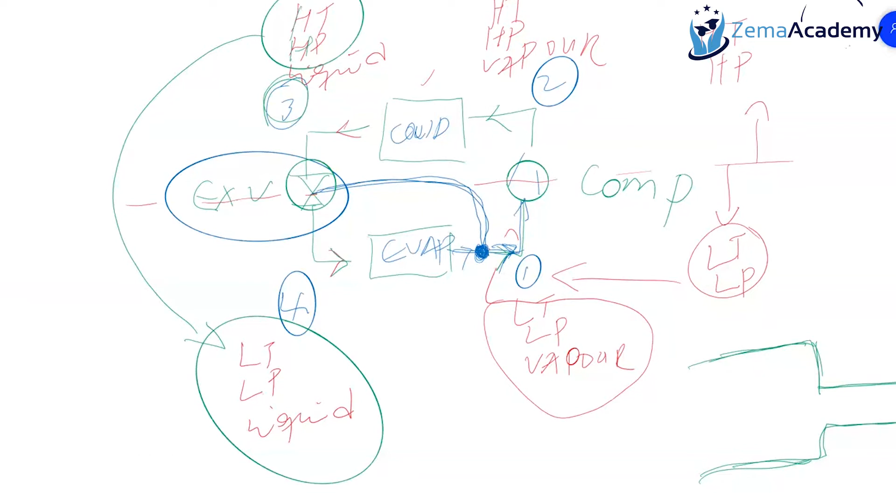A venturi and an orifice. So imagine this is a pipe, and all of a sudden we are reducing the area of the pipe. Imagine you have pressure and velocity here, P1 and V1, and another pressure and velocity here. What happens to the velocity from point 1 to point 2? If you suddenly reduce the area of the pipe, the velocity has to increase. And Bernoulli's principle states that velocity and pressure are inversely proportional. So you have area 1 and area 2; if you increase the velocity by reducing the area of the pipe, we reduce the pressure. So there's a pressure drop, and P2 reduces in that small area.

So any venturi or orifice uses Bernoulli's principle. They constrict the area of the pipe, and therefore increase the velocity but reduce the pressure. So we have a big pressure drop here. And if you reduce the pressure, what happens to the temperature? It reduces. Remember, pressure and temperature are directly proportional; whatever you do to the pressure, temperature will always follow. This is the principle behind any expansion valve: by reducing the area which the refrigerant passes through, we reduce the pressure and therefore the temperature.

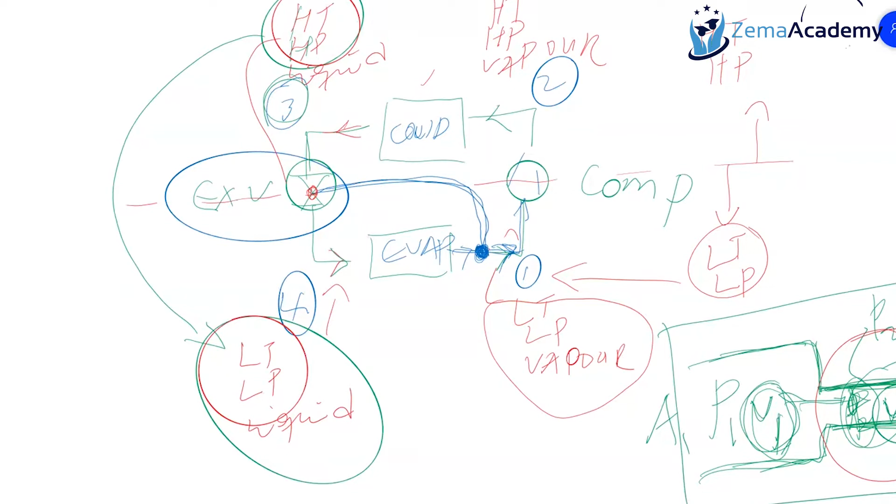So if we go back to our diagram, by having that venturi or orifice here, we reduce that high temperature and high pressure, and at point 4 we have low temperature and low pressure liquid. We will look at some of the expansion valves, and don't forget, all of them have an orifice or venturi, and they all use Bernoulli's principle, looking at pressure, velocity and area of a pipe. The function of an expansion valve is to regulate the flow of the refrigerant.

Okay, and the way we regulate the flow of the refrigerant is by either using a fixed flow or a variable type of flow. So on one aspect, we're not able to react to the pressure of the system or the heating or cooling capacity of the system. It's very fixed. And the other types, we are able to respond depending on the pressure in the system, depending on the temperature in the system.

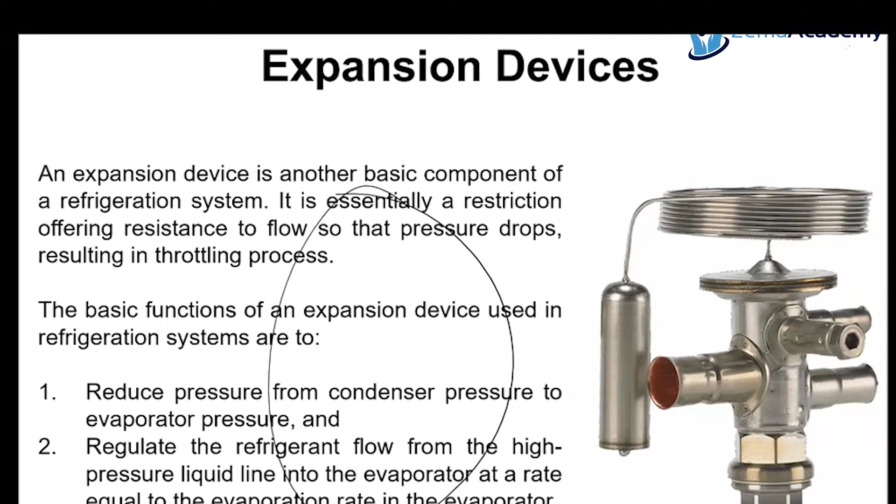We are able to vary the flow of the refrigerant coming in from the condenser, passing by the expansion device. So yes, again, we have a fixed opening type and a variable opening type. And those are the two types of classification method that we can use for expansion devices.

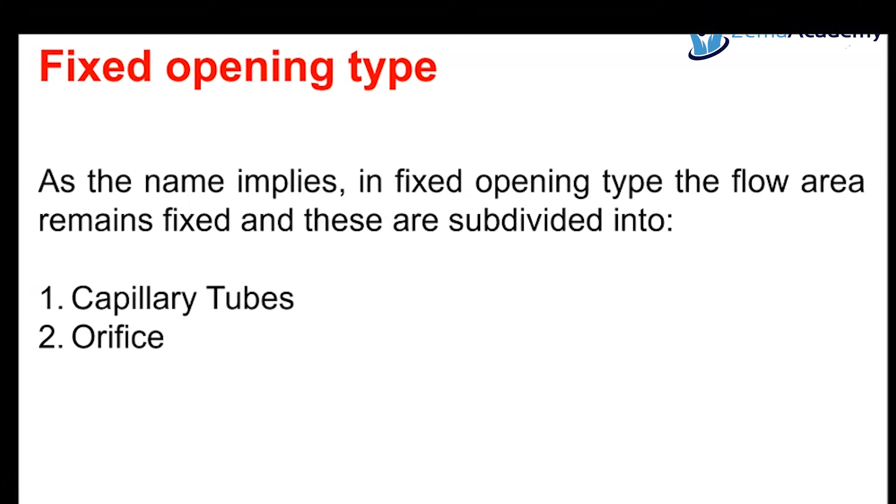Okay, so we will look at in a minute what we mean by fixed opening type and what we mean by variable. One is the capillary tube, and we will look at in a minute what a capillary tube looks like. And of course, the other one is an orifice. So a capillary tube, a very, very thin, long, narrow tube, is the capillary tube that we use as an expansion device.

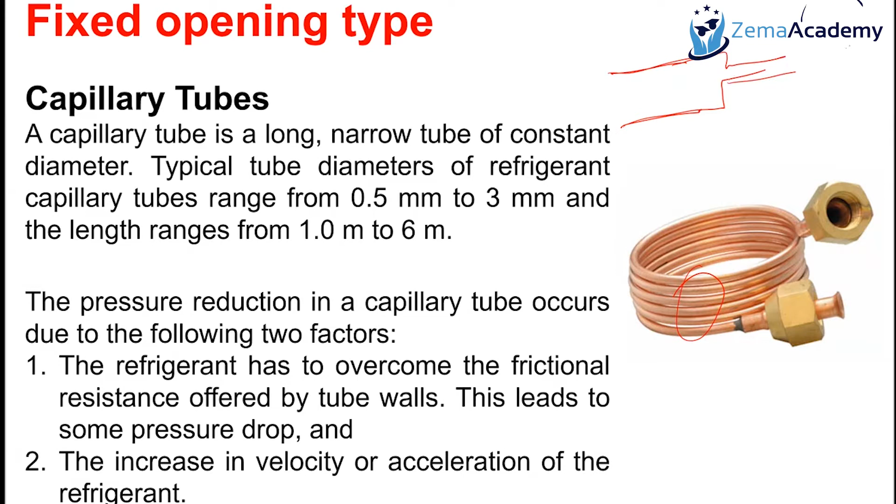The diameter of the pipe can vary between 0.5 millimeter to 3 millimeters. And if you look at the range, the length of the pipe, between 1 to 6 meters. And ultimately, again, all we're doing is we are using that capillary tube to suddenly reduce the area of the pipe. Okay, that small capillary tube.

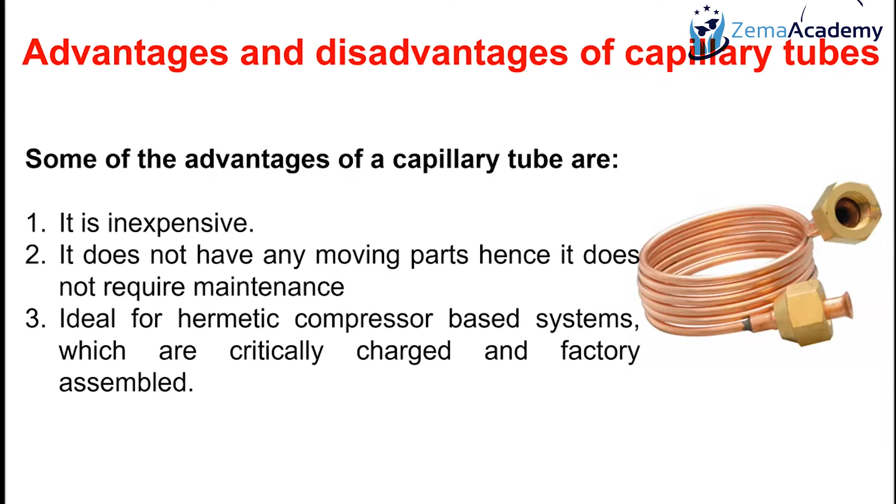If you look at the advantage, so we will try to look at the advantage and disadvantage of the different types of expansion valves. Of course, this is just a very thin copper tube, so it tends to be relatively less expensive than the other types of expansion devices that we will look at. Of course, it doesn't have any moving parts, hence it does not require a lot of maintenance, and it tends to be ideal for hermetic type of compressors.

And if you look at the disadvantage, of course, one of the disadvantages, as we said, it's fixed. It does not react or respond to what's happening in the system, to the pressure change, to the temperature change, to heating or cooling capacity of the system. So it's very, very fixed. So you don't have the flexibility of varying and controlling the flow rate as you would want to. Again, because the diameter of the pipe is very thin, it's susceptible to clogging.

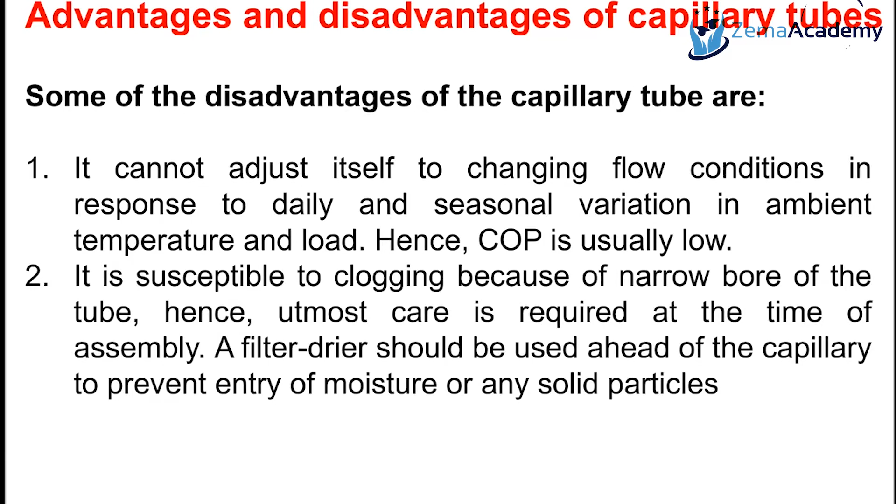And of course, if you look at the other types of expansion devices, which are the variable, there are a few examples. The automatic expansion valve is one example of a variable opening, and sometimes it's called the constant pressure. Thermostatic expansion valve, I'm sure most of you have seen. And then we've got the float type expansion valve, which is very similar to the one that you have in your toilets, and electronic expansion valve.

So we will look at some of these examples again, and we'll look at how they ultimately operate and where we have the Bernoulli's principle. So if you look at the automatic expansion valve, as I said earlier, it's also called a constant pressure. So its primary function is to maintain a constant pressure in the system. And if you look at the expansion valve in itself, we will look at the different parts. So here we are coming in from the condenser. Of course, we're using strainers or a filter.

And here we have a needle with a spring which reacts with the pressure differences. So here we have a diaphragm, very, very thin material, which easily reacts to pressure differences, depending on whether this pressure is higher or the pressure here is lower. So let's say if this pressure here is higher, we are pushing the needle up there. And coming back to what we said earlier, every expansion device uses an orifice or the Venturi principle.

So all of a sudden, as you can see, we are reducing the area at which the refrigerant passes through. Okay, so therefore it's using the Venturi or orifice or Bernoulli's principle. So by using pressure, we are able to either push the needle down here, therefore we let more refrigerant through, or by pushing the diaphragm up there, we are able to close that, therefore limiting the amount of refrigerant we pass through. And of course through here we're going into the evaporator.

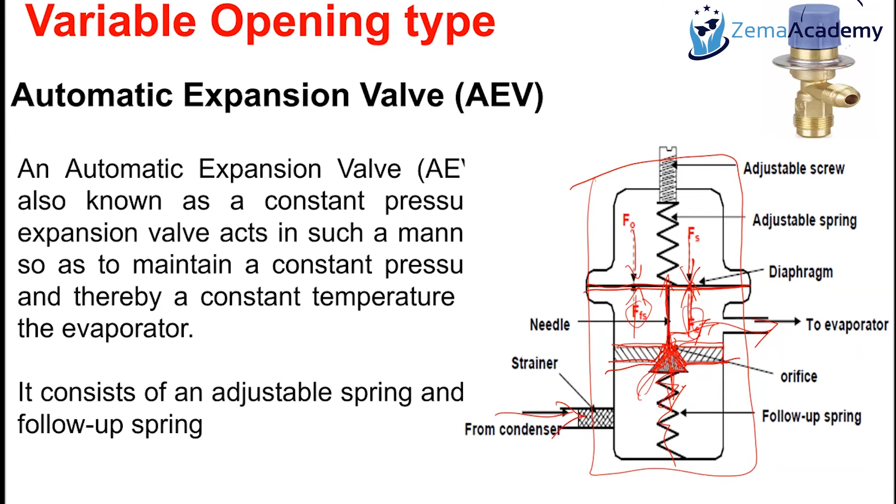So ultimately, as we said, the main principle behind it is the Venturi or orifice or Bernoulli's principle, limiting or reducing the area at which the refrigerant is flowing through, looking at the pressure differences and how it responds. And if you look at the application of AEV, as the name stands, it is also called a constant pressure. So wherever there is a need for a constant pressure, therefore constant temperature, we can use that. Milk chilling units, water coolers, are some examples.

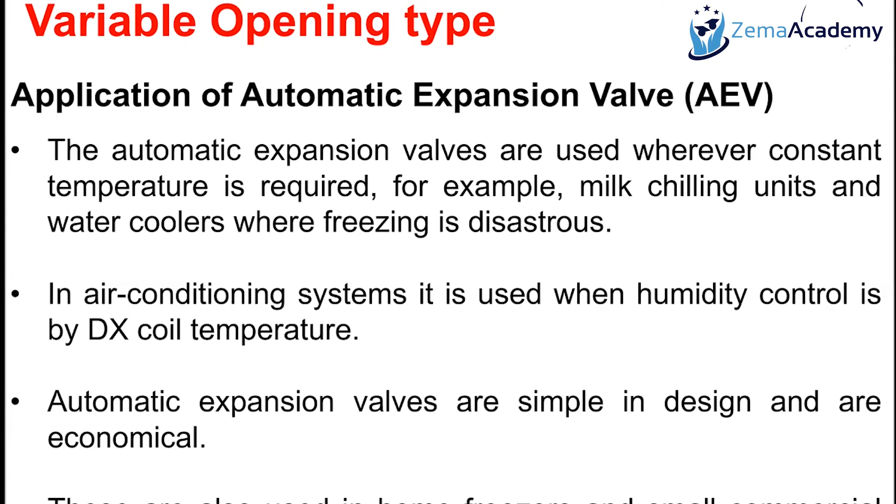They tend to be simple in design, and therefore, of course, compared to the others, it's economical. Okay, so that is another variable opening type, which is the thermostatic expansion valve. A thermostatic expansion valve, as the name stands, thermo means heat. So it monitors temperature coming out from the evaporator.

So this is our evap. That part is what is in there. And of course, this is what we have in the expansion valve. So the whole part, and we'll look at it in a minute. So ultimately, we monitor the degree of superheat. We make sure everything we send into the compressor is gas. Okay, so that's why it's called thermostatic, because it's monitoring the temperature, the degree of superheat from the evaporator.

We are maintaining a constant degree of superheat at the exit of the evaporator in order to make sure whatever we're sending is gas. We've discussed earlier, ultimately it's there to protect the compressor, to make sure slugging doesn't occur, to make sure we don't send any small droplets of liquid into the compressor. So let's look at how it looks like. Again, it's the same as the circuit that I've just plotted.

So the feeler bulb is, again, that is called the feeler bulb. The one behind, you can see the bulb, a small bulb, and ultimately, as I've drawn it there, it is monitoring. So this is going into the compressor, so coming out from the evaporator. So this is your evaporator here. This is coming out, and using the feeler bulb, we are monitoring the temperature going to the compressor. So here you have your compressor.

Okay, so what is inside the feeler bulb and how does it work? Actually, again, let's go back to the Bernoulli and Venturi's principle. So here we are coming from the condenser, and as you can see, we have our favorite word, our Venturi or orifice. Okay, and again, by using a diaphragm which easily moves depending on the pressure. So what happens here is inside the feeler, we have another substance or another refrigerant, which boils depending on the temperature sensing here. We can easily boil this refrigerant inside here.

So what happens is, as it boils, the pressure in here varies. So we are either pushing the diaphragm down, therefore we're pushing the needle down, letting more refrigerant, or if the pressure difference coming out from the evaporator is higher, we're pushing the needle up, therefore closing the orifice more and limiting the refrigerant flow. So the fluid inside the bulb is called a power fluid, and often the substance that we have here could be the same refrigerant as the refrigerant inside the circuit, but it can also be a different substance or liquid.

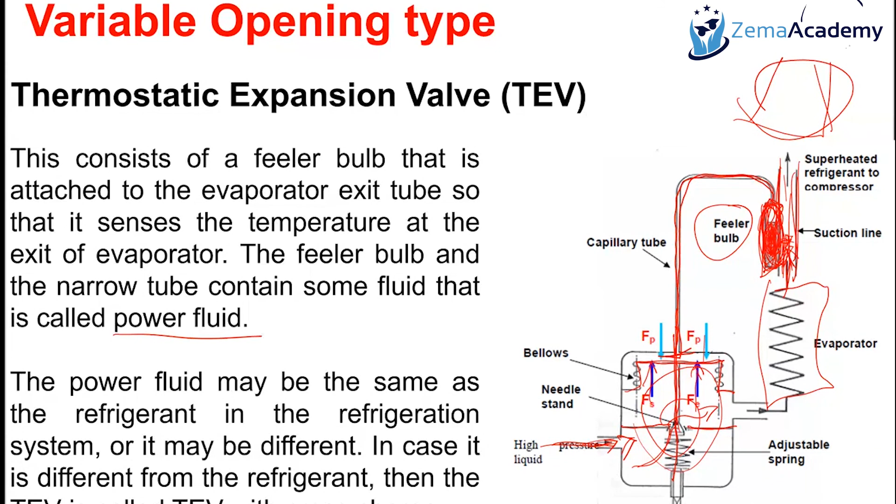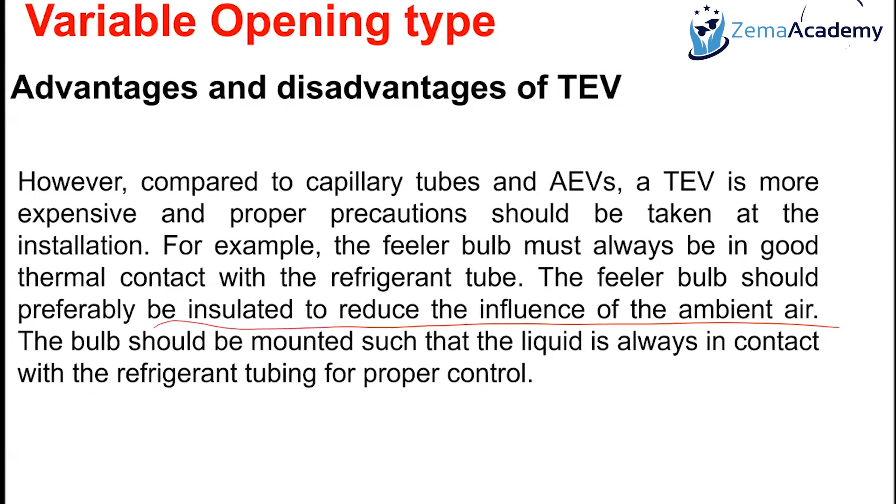Let's recap quickly. Expansion device. By now, you should know the function of any expansion device. By maintaining a constant degree of superheat, we are able to protect the compressor from slugging, but we are also able, by using Bernoulli's principle, an orifice or Venturi, and I like the word bottleneck, by reducing the area of the pipe, to reduce the pressure and also reduce the temperature. So when we go back into the evaporator, we are going back as a low temperature and low pressure liquid.

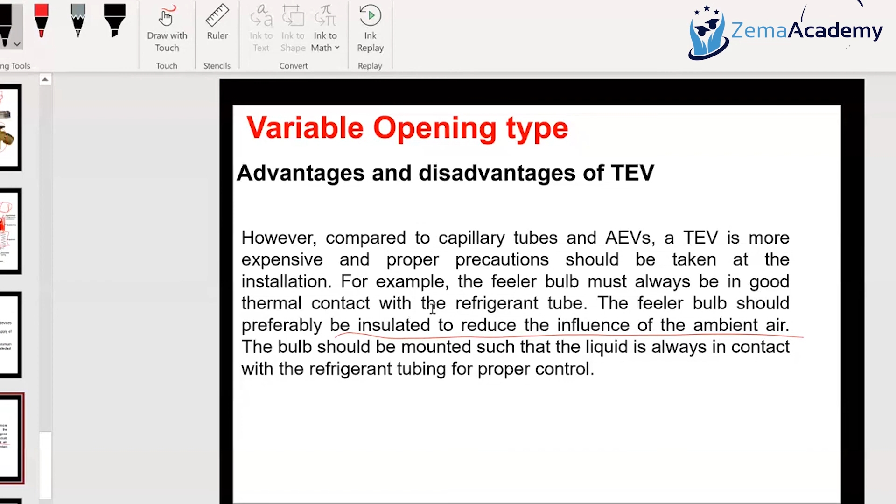And then we've looked at the classification methods of any expansion device. Two classification methods, either fixed or variable opening types of expansion devices. And then we've looked at a few examples of the different types of expansion devices.